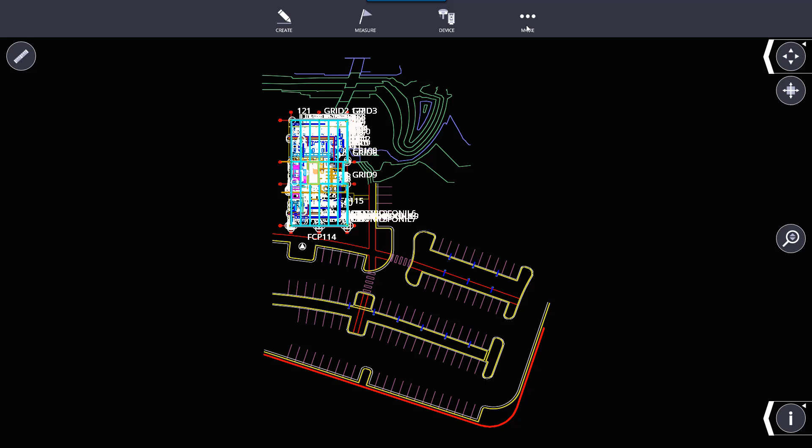When we go to More, our first option we can select is Map, and this gets us to a map view where we can see our model, see our points, and get a basic feel for what we're working with. We have all of our navigation tools in here, and we also have the measure function in here.

Going back to More and selecting Jobs, we have a few options here: Manage, Import, Export, and Settings. I'm going to jump to Settings first because normally you want to set up your settings.

In Trimble Field Link, once you set these up, they'll always stay the same unless you change them. So when you set up your distance units, coordinate order, temperature, and language, it will remain the same. You won't have to do this for every single job, just once at the beginning.

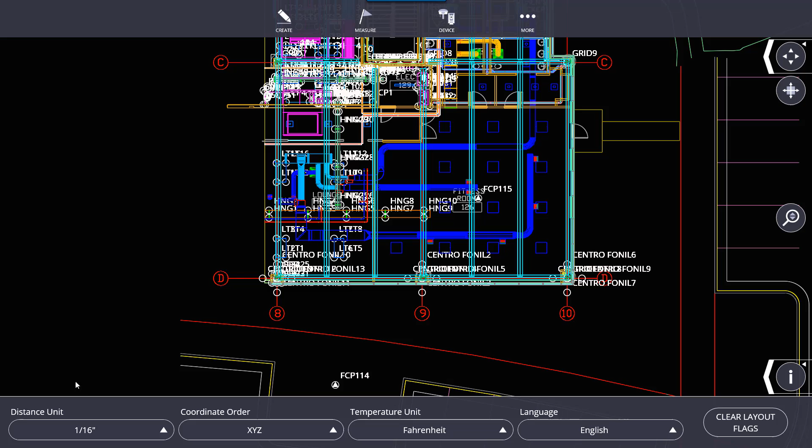The first option here is distance units, which will display measurement units either in meters, decimal feet, quarter inch, eighth inch, or sixteenth inch, which basically rounds off our measurements to the nearest quarter, eighth, or sixteenth. Normally I leave mine at a sixteenth because I want to see the exact distances, or as close to exact as possible. If you set it to a quarter, all your distance measurements are going to round to the nearest quarter. The unit will still record the exact measurement; it's just going to display the information rounded to the nearest quarter.

For coordinate order, we have XYZ and NEZ - northing, easting, and elevation - and XYZ is x-axis, y-axis, and z is elevation as well. A lot of surveyors use NEZ. You can switch between these two on the fly, so watch out for that. Normally XYZ is standard for your CAD department.

For the temperature, we have Fahrenheit and Celsius. I'm just going to leave it in Fahrenheit. And for language, you have a few language options here that you can switch between.

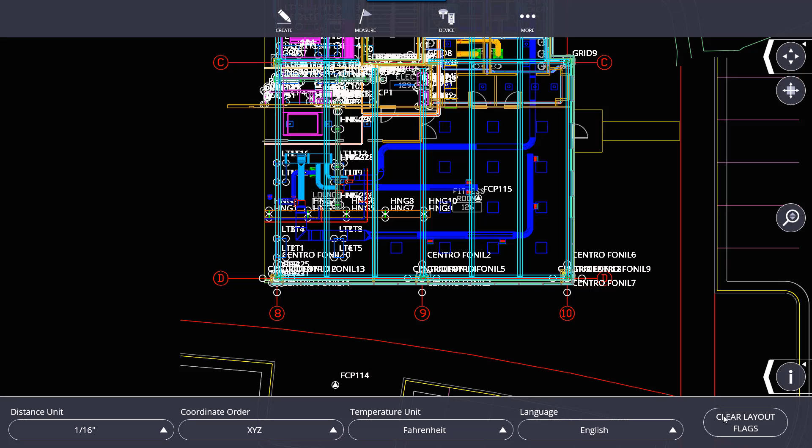Our clear layout flags option here - if we've staked points, like I have these points staked here, these shown in green are basically ones staked in tolerance, and these are shown to be staked out of tolerance. If I want to clear all of my stake data, this will not delete your points. It's only going to delete the information that has to do with staking the points out in the field. If you hit the clear flag button and then click clear, it will erase all the information of all the work you've done on this job.

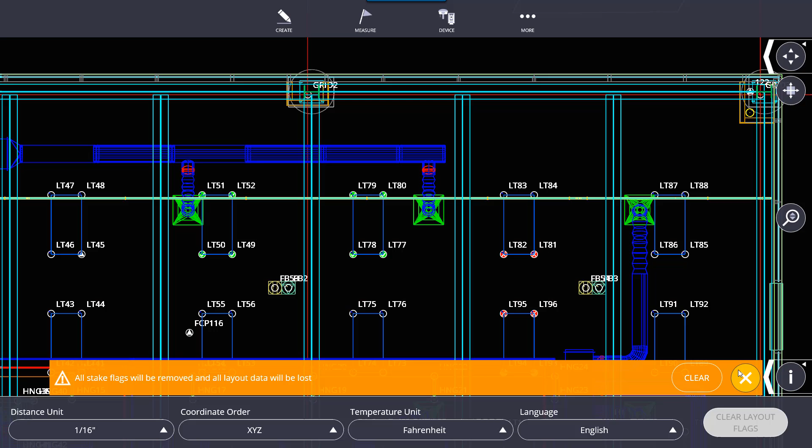I would only use this if you've started laying out a job incorrectly, meaning you loaded the wrong file for the job you're using and needed to clear it out. For the most part, you're not going to clear the layout flags. If you staked a point that's out of tolerance, you can select that point and restake it - you don't go in here to clear everything.